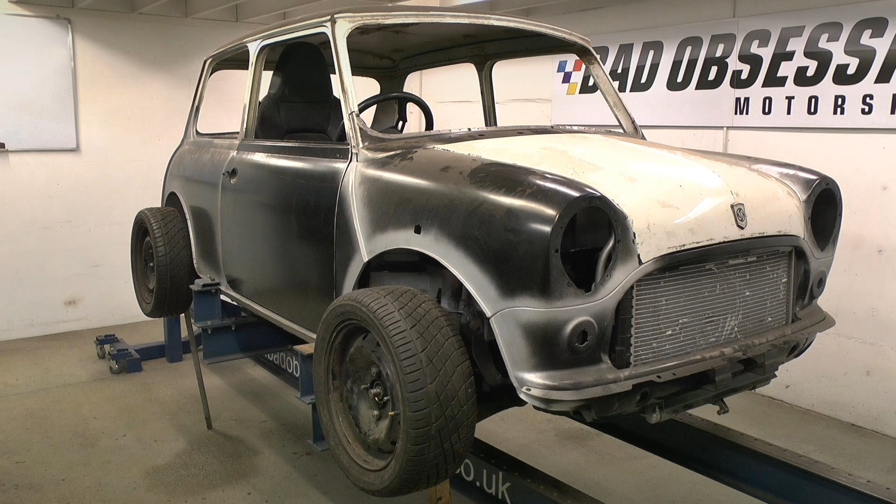Coming up in episode 13, Nick goes completely off script. I mean, it was all bollocks anyway. Look, there's not even anything written on this piece of paper. I'm still wearing a hat. And Ralph takes a nap on the Mini.

At the end of the last episode, Nick said, "You know what? I think we're going to have a look at the fuel tank first." Which confused me somewhat, as we have a perfectly good one here. Yeah, I don't think that's going to work. Some bellends put a strut tower in the way. Ah yes, that was you, wasn't it?

I think it's fair to say we've kicked around just about every option there is when it comes to this fuel tank, and we keep coming back to the same big problem, and that is, well, it's me, again. See, I want to be able to use this car, and that means it needs some range, so ideally I'd like a 50-litre fuel tank, and because it's me, I'd also like to have a little bit of luggage space left over as well, and that's quite a lot to ask of a very small space. Probably worth pointing out at this point as well that none of the options are going to allow us to run with a spare wheel, so that's just something we're going to have to live with.

So, brief history of the tank discussion. Standard Mini fuel tank is right out. It's too small to start with. By the time I've cut enough out of it to get around there, it's way too small. Next option is twin tank. Would be very appropriate, would love it. However, twice the fabrication, twice the plumbing, twice the cost. I also don't think it's a bad idea to keep the fuel tanks away from these two back corners, knowing what mine and Richard's right foot are like.

So we're there on a single big tank. Now we have tried to find a single big tank off the shelf that will do, and there isn't one. So again, we're going to end up making something. And I think it's going to fit on this raised bit of shelf here. So we know it's going to sit there. We know we've got just over 900mm between the inner strut towers, so 900mm on maximum width of tank. We know what the angle is between that bit of flat and the seat back, and we know that we've only got 250mm between this level and the bottom of the fuel filler hole. For everything we don't know, it's over to my colleague.

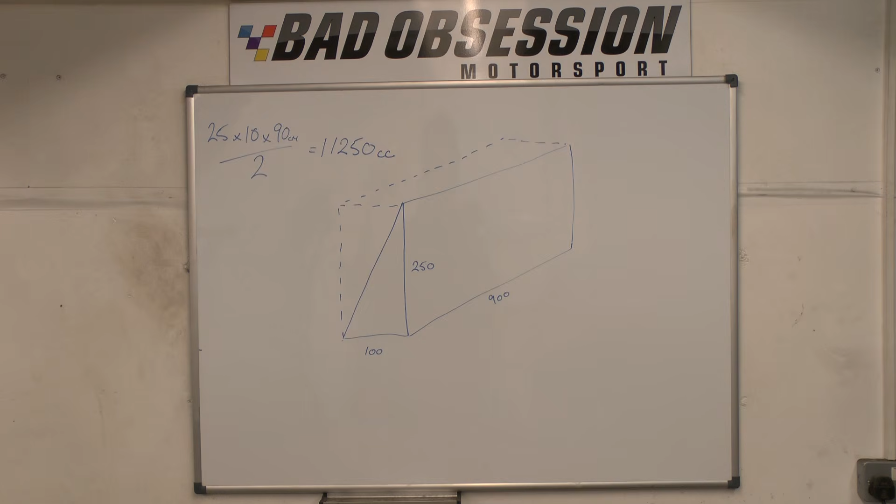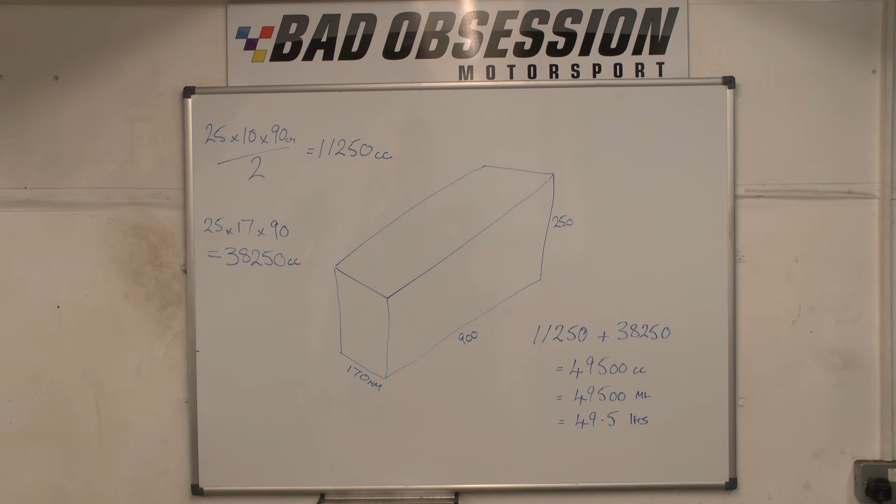This part is trickier. We know the height and the length, but we don't know the depth. To solve this, we need some algebra. So we've got to solve for x. First, simplify to 90 times 25x equals 38750. Alright, keep your hair on. The answer is 17.22 centimetres. But we're going to round it down to 170mm to give us 38250 cc. Add the two parts together and we have a total tank capacity of 49.5 litres. We need 50mm expansion room in the top of the tank, so we've made the height 300mm. So these are the dimensions of the tank we need to make.

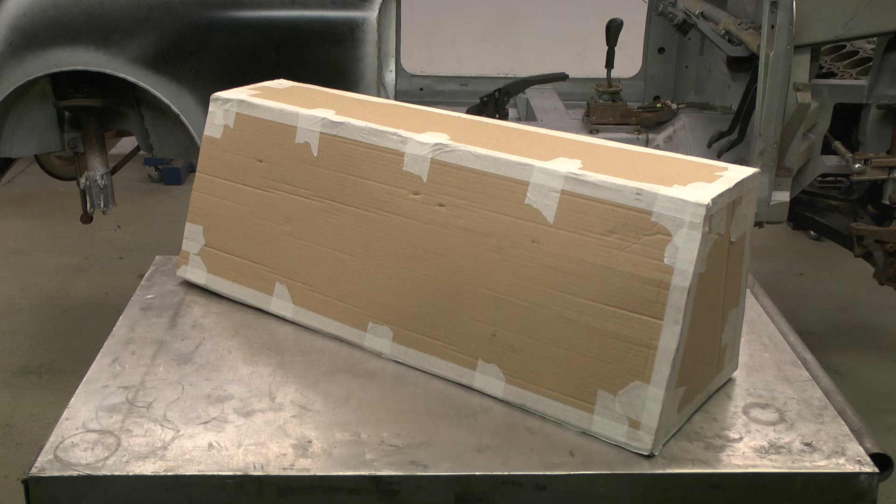So I feel an enormous template coming on. Our normal white card is a bit flimsy for something this size, so we've broken out an old corrugated cardboard box to modify for this purpose. We're still sticking to the trusty old masking tape though, you can't whack it. After all that cutting and taping, you end up with this gargantuan thing. Having said that, we're both suckers for an enormous box. That actually fits really well, but it's a bugger to get in and out.

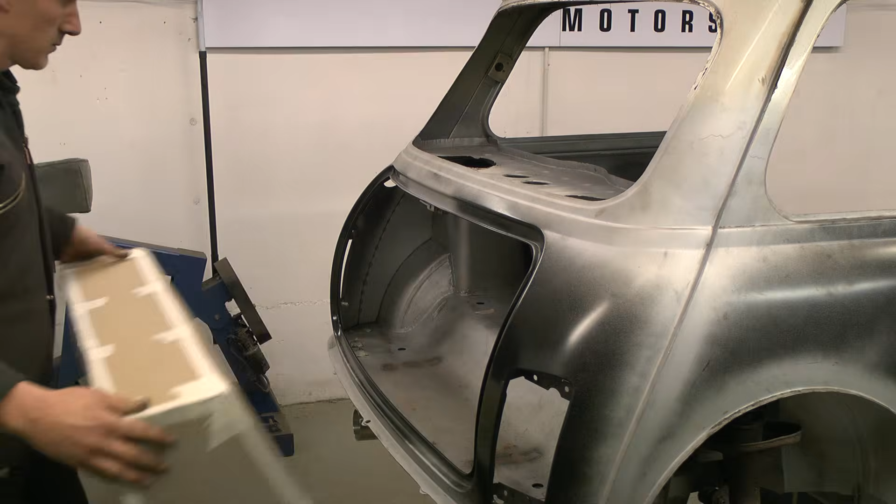And at the moment, it's just a bare box. It doesn't have any of the things a fuel tank needs, like a filler neck or a breather or a pump outlet. So I think the best thing to do is take it out and try again. We're going to lose 25mm off the height and 25mm off the length. Now this will lose us about 1.5 litres of capacity and half of our air gap, but, you know, needs must. So there's your 48 litre capacity. And there's your new receptacle. Should slide in a bit easier now. Lovely.

Well, that goes in a whole lot easier, so I think that's the final dimensions of the tank sorted. But before we get too carried away doing anything else to it, we need to think about a mount to sit it on. The trouble is we can't really make one until we finish the tank. So for now at least, I've got a couple of bits of flat bar that are going to keep everything in the right place until we get there.

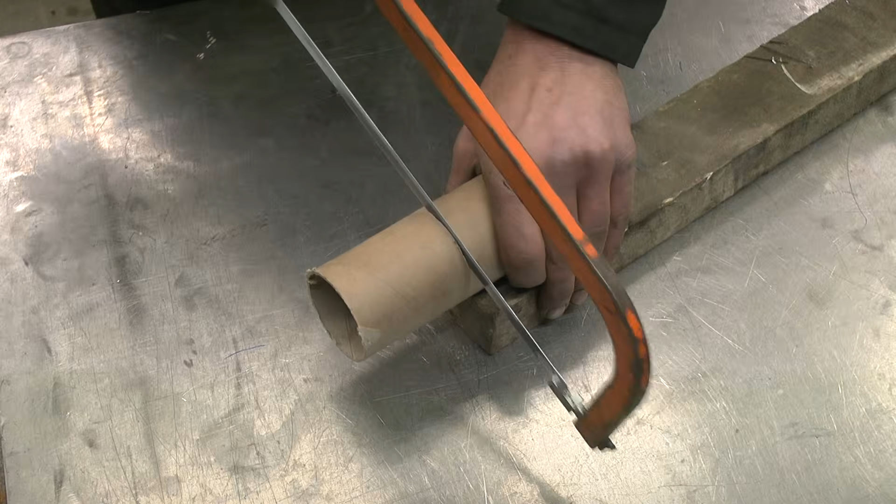Okay, now we can start thinking about all of the other things that the bare fuel tank needs. And I think we'll start with the filler neck. Well, as good a place as any, I guess. A hacksaw, some wood and a cardboard tube will make the dummy filler neck, and with that done, the template is nearly finished. The filler neck was just the beginning. We've also got this lot to consider.

We have got a filler neck breather, so air can escape when you're putting fuel in it and stop clicking the pump out. We've got an in-tank fuel pump, which is the way everyone does it nowadays because it's much simpler and neater. Having said that, the Celica's got a very shallow tank on it, so while we can use the pump on an extension, the return and the fuel sender unit are pretty much useless to us. So, to get around that, we've got a separate sender unit and a separate fuel return.

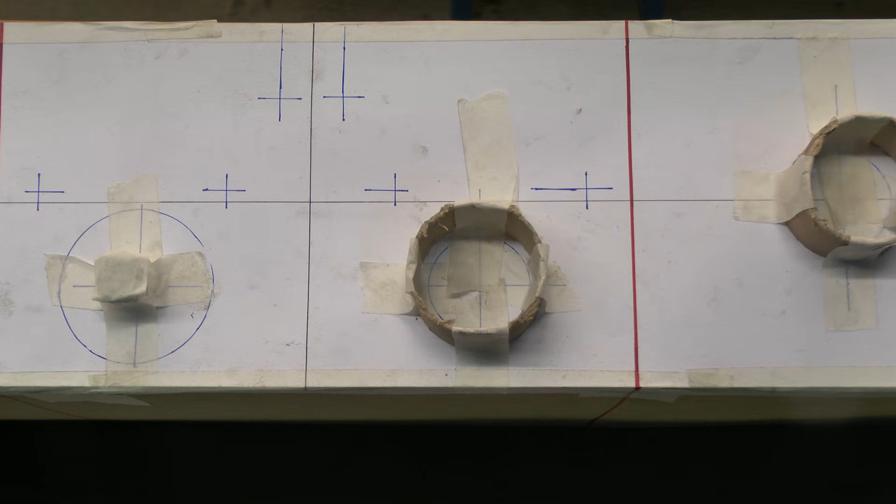This bit here represents a vent and tip over valve, and then these little blue crosses mark the centre lines of some bosses I've got to weld in, so we've got something to cable tie the fuel lines to. And since it's quite a big tank, these red lines here represent some internal baffles we're going to put in to stop the fuel sloshing about quite so much.

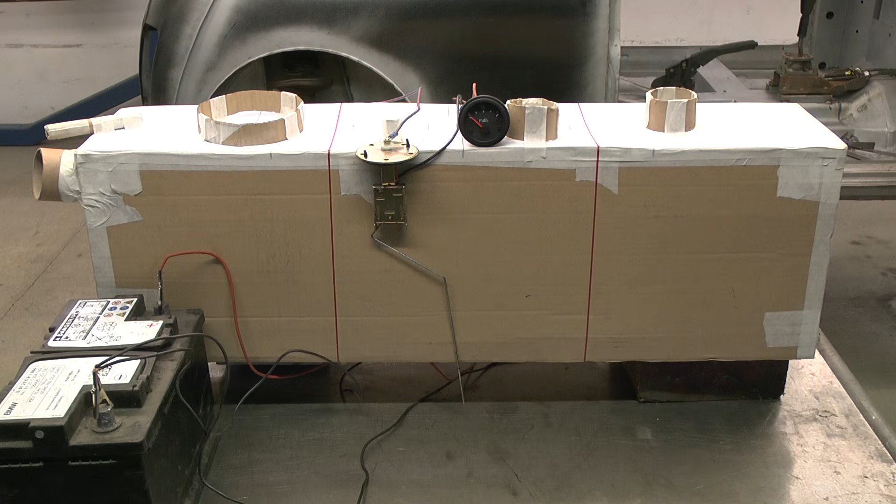I'm pretty sure all this will work fine, but before I commit any further, I need to check that the fuel sender I've got will fit the space available. We've jerry-rigged the sender unit up just to make sure it's somewhere there or thereabouts. And all that looks pretty good from here.

And one last thing is I've added an external sump cum swirl pot that kind of needs to go through the boot floor. Brilliant. Yet another hole in a perfectly good panel just to make things that little bit more complicated than they already are. He just can't help himself, can he? It's an affliction. Still, the box fits pretty nicely and there's plenty of room under the floor.

And while I'm sure that lightweight laminated cardboard fuel tanks are indeed the future, we're not quite there yet. So we need to do that all over again, but with something more substantial. But what to choose? Well, we could go for steel. It's cheap, it's easily available, it's nice to work with, but I'm unsure about its long-term exposure to toluene. Now we could get around that by using stainless steel, but that's heavy and expensive, but it is shiny. So I suppose that brings us to the fairly obvious solution of aluminum. But instead, we're going to use aluminium, because that's what it's called.

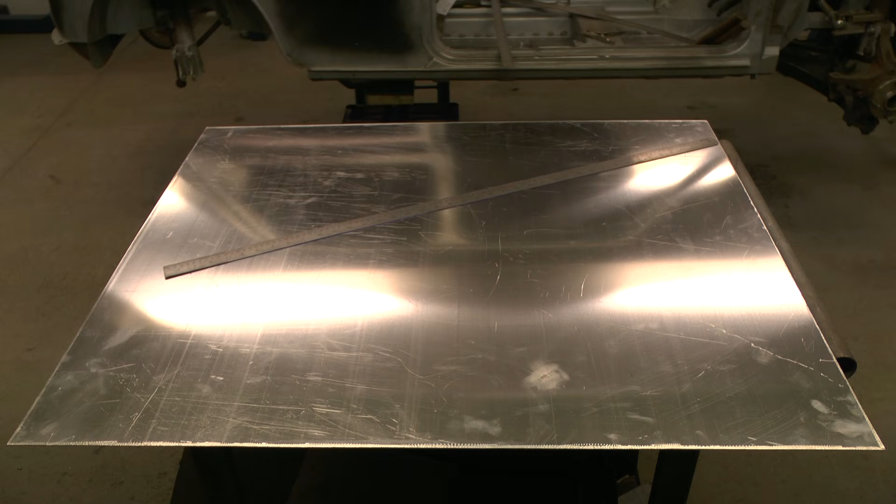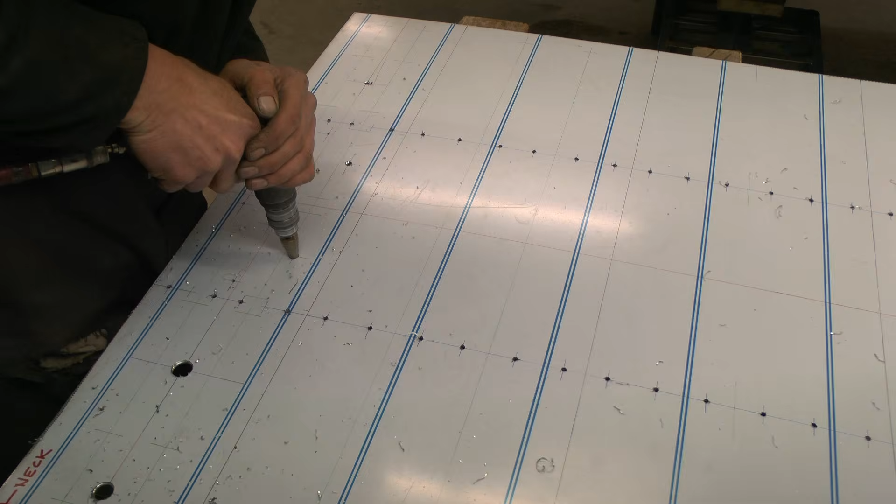Quite. Here's a shiny new piece of aluminium that's been cut to the right length, but it's 25mm longer than we expect to need to allow us a bit of room for error. We're working to this plan for all the measuring and marking out of swage lines, hole centres, boss locations, etc. And the task of transferring it all onto the alloy is laborious, but vital. After all that, we can pilot then drill out to size all the holes needed for the tank's baffles, sender unit, the in-tank pump, return and the breather.

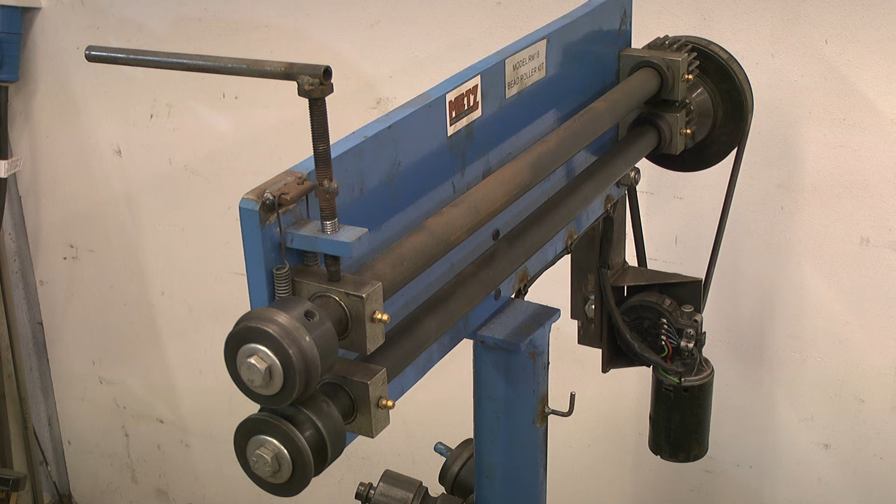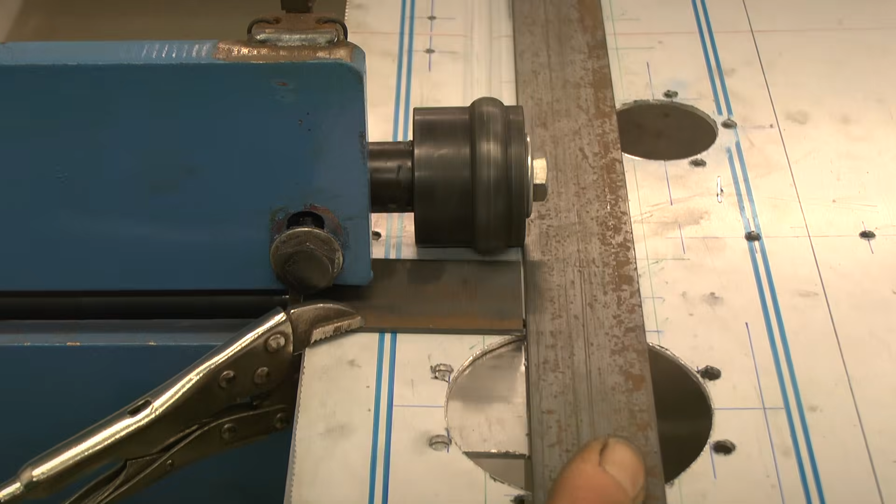I think it's time for the bead roller. The bead roller, like most of our equipment, has been touched by the hand of madness. Another wiper motor and another unnecessary modification. It's not unnecessary, I don't have enough arms. A few bits of flat bar act as a guide and stops, and now it's time to see if his infernal contraption works. Well, that wasn't the complete disaster it might have been.

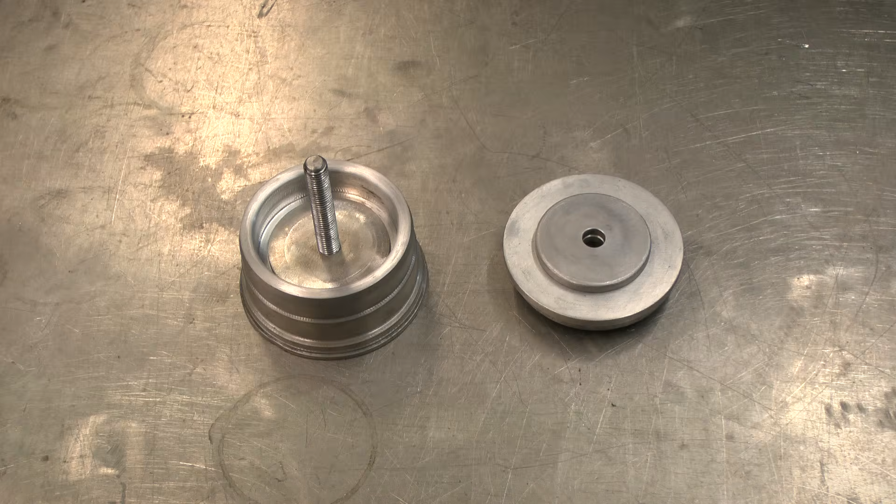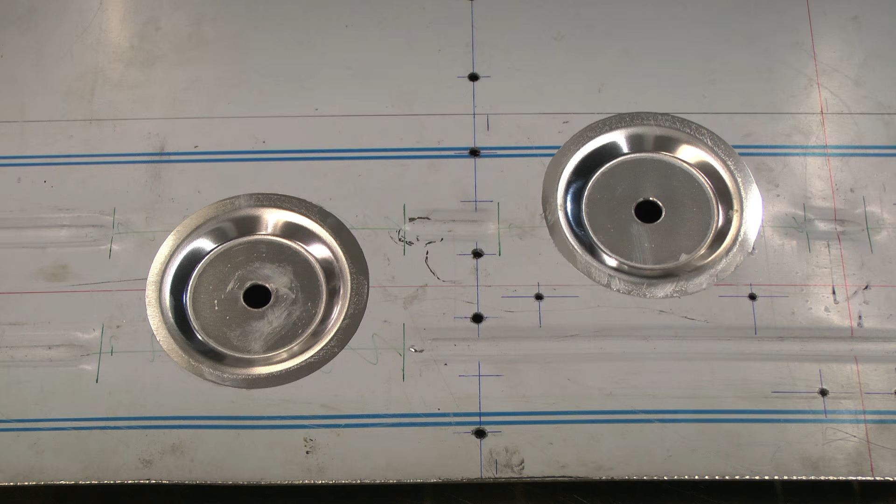With the bead rolling complete, you can see the one destined to be in the bottom of the tank is rolled the opposite way. The next job is to create a large inward swage around the return and the vent holes. We didn't have a dimple die big enough for this job, so we made one. And it works something like this. Now we can drill these out to size for the relevant fittings.

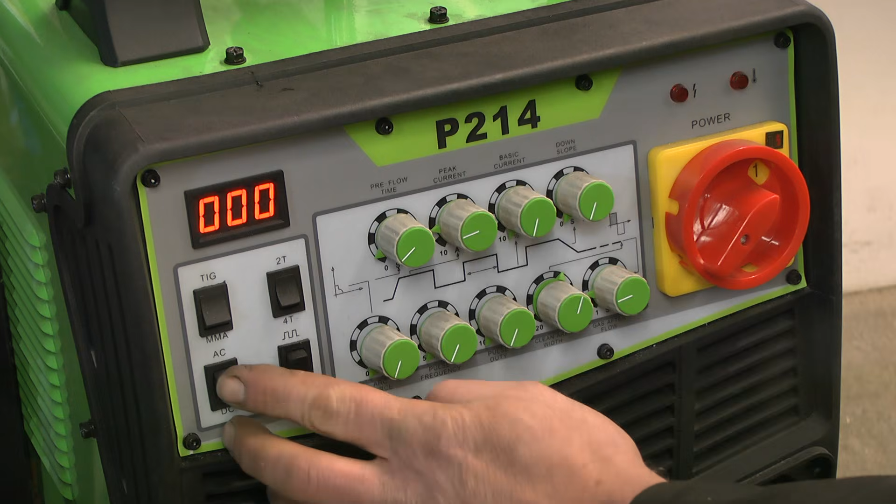And the next job is to whack everything that's got to be fitted in and decide what we can weld from underneath. The captive nut rings for the sender and pump, along with the little alloy bosses for the hose clips, can be TIGged on this side. Time to switch to AC and turn the welder up to 11. Well, at least 5 anyway. That's the first bit of welding on the new tank. And while it's not pretty, it'll do.

Well, that's that bit sorted, but before we go any further, I've got to have a haircut. Excuse me a second.

Whew, that's better. Right, where were we? Oh yeah, I think we're ready to bend this tank up. Time to break out the bender. Or the sheet metal brake if you prefer.

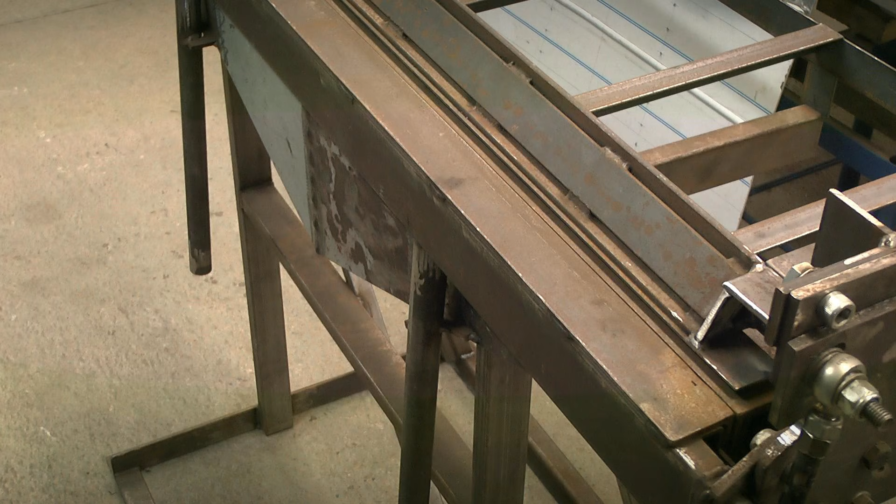You may have noticed we've replaced the big heavy duty bending blade with this much smaller one, and that's for a couple of reasons. The first will become very apparent when we start to bend it up. The second is that this little one's also got a nice radius lip on it, which should give us a bigger bending radius and therefore avoid tearing the alloy. We've already done a couple of test bends so we can get our eye in with where our lines are. So, here we go.

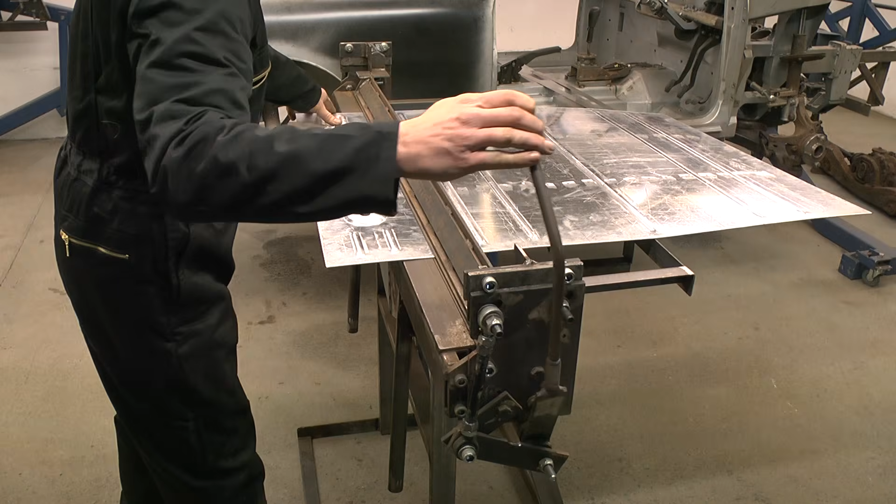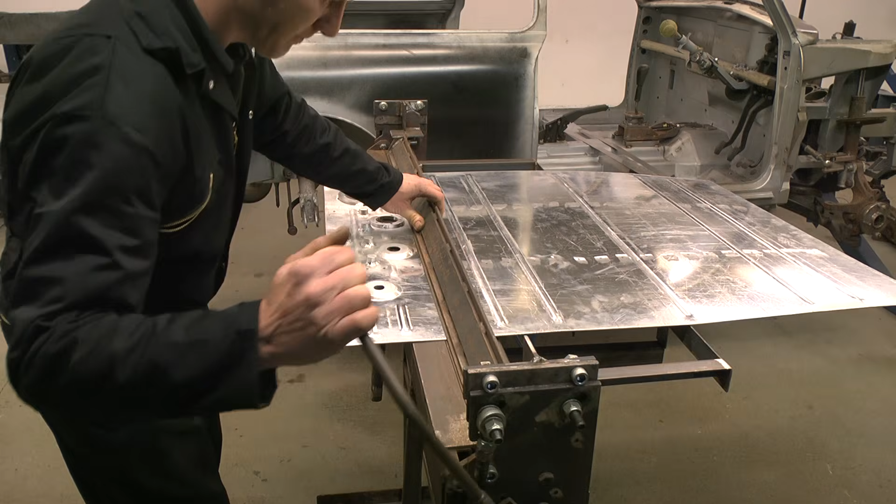Bring the blade down a bit. Line it up exactly where we want it. Clamp it fully. Check it, obvs. And bend it. Probably didn't need that much. Unclamp it, drag it through and do it all over again.

He may sound blasé about it, but one false move and hours of work go in the bin. You only get one shot at bending alloy like this. And then the same again for the final time, only this time over 90 degrees, and we should end up with something that looks like it might become a fuel tank. So.

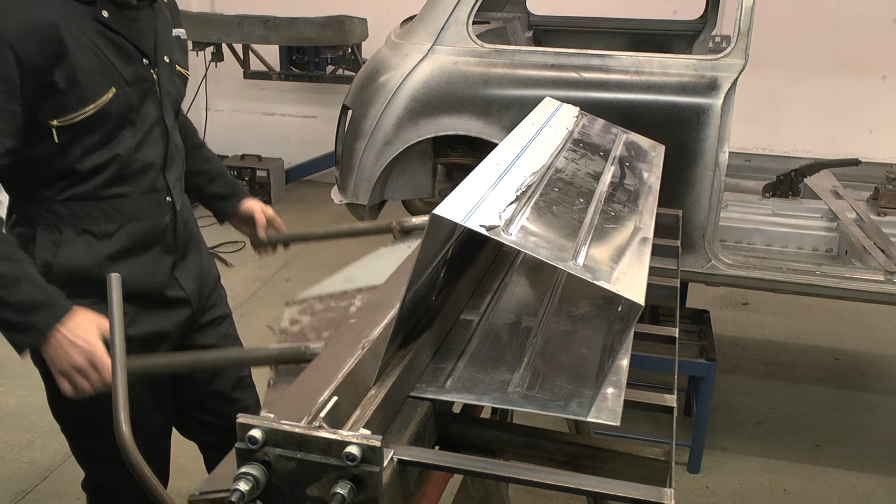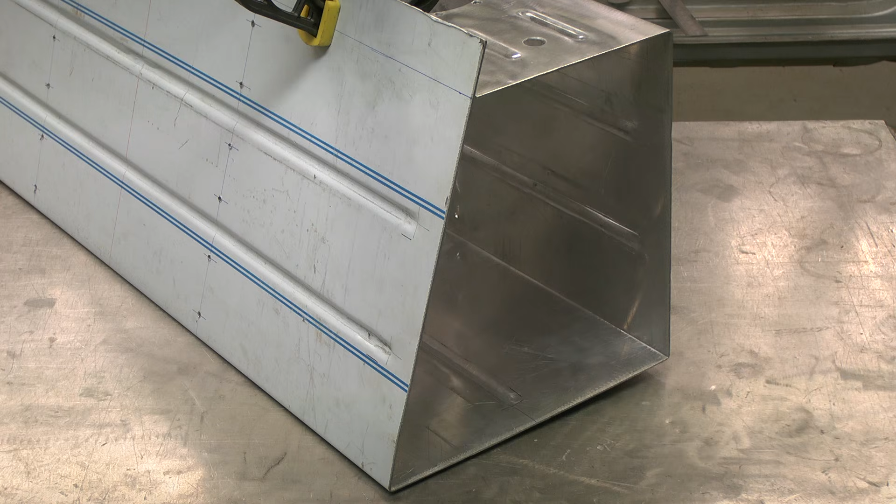Thankfully, nothing went spectacularly wrong. So what we've ended up with is this, the makings of a fuel tank. We can just trim that overlap off exactly at the line. You can now see that the only convex bead at the bottom acts kind of like a sump channel. So now all we have to do is weld up this seam and add a couple of ends on. Simples. I'm afraid it's just not that simple.

There's loads that needs to happen before we get to that stage. I find it odd that everything in voiceover land seems to be so easy. Do you know what I find most baffling? It's these, and they need to go in next.

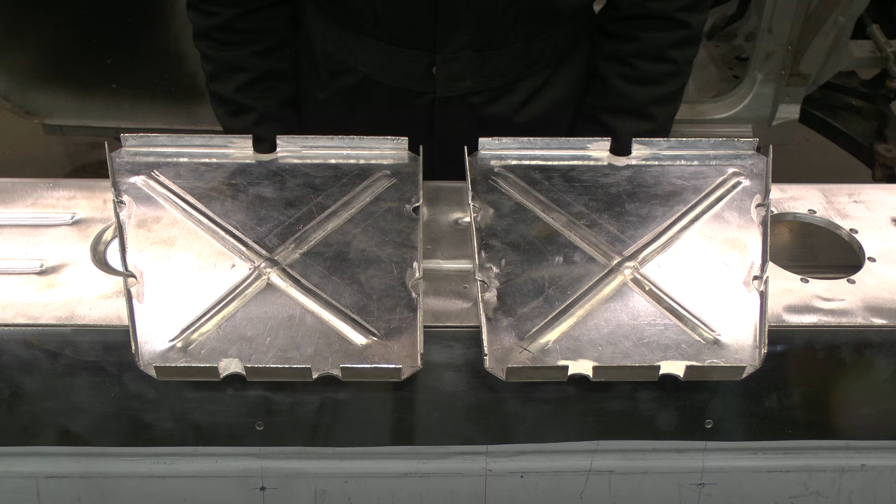God, really? Don't groan. I'm doing the best I can with what I've got. I tell you, voiceover land isn't exactly a bed of roses either. It's all I can do to make you look competent.

Anyway, on to the obligatory plug welds for the baffles. There's dozens of these and they're boring, so we'll move swiftly on to the linishing and the minor adjustment. We'll worry about getting rid of those linish marks when the thing's finished. Right now what we need to worry about is getting this swirl pot stroke sump thing attached in the right place. So we've made that hole in the boot floor a bit bigger for some clearance and spent way too much time trying to measure and mark this out correctly.

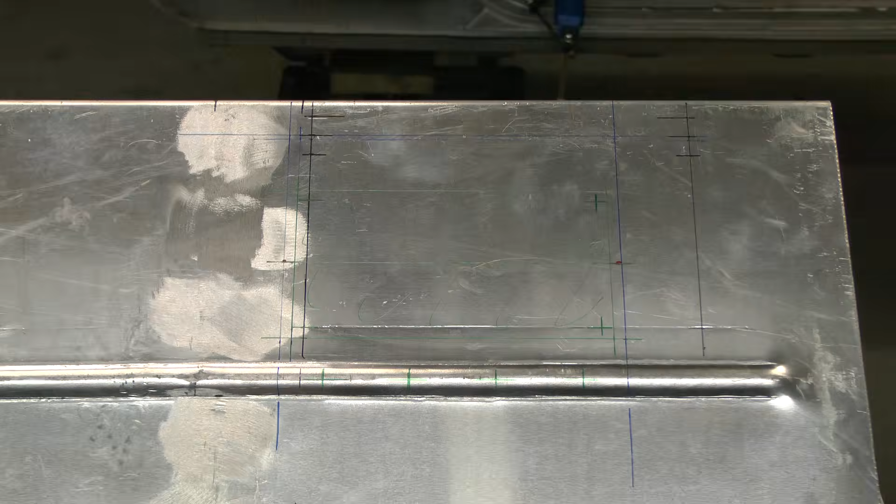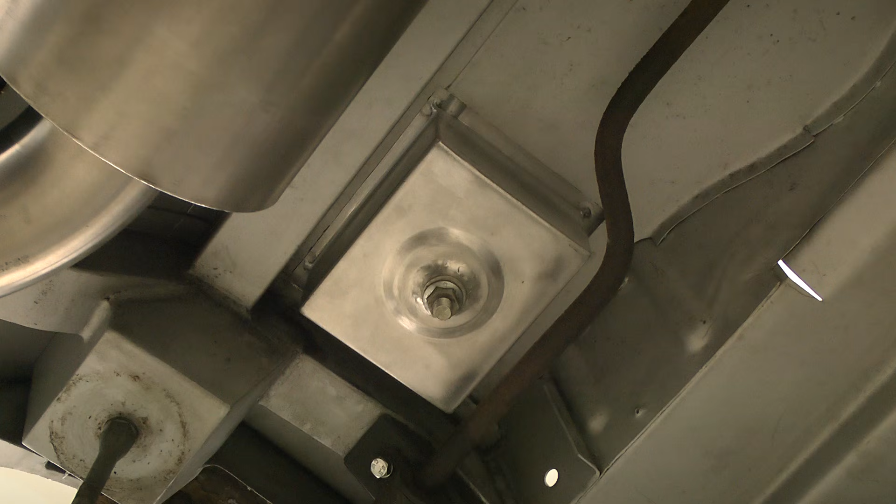But now it's done, a few holes and a grinder later, and the hole is cut out. The hole is smaller than the sump as it only needs to be big enough to pass through the filter sock on the fuel pump pickup. With the sump, swirl pot, fuel collector made, it just gets tacked on for now to make sure we can actually get the tank in the car. And yes, this shot took more than one take after twatting the bloody thing on the boot lid surround multiple times. We've added a drain plug, just in case we decide to drain all the fuel out for some reason.

With the fit confirmed, the sump is then welded on fully. The next task is to weld in this -6 fitting for the fuel return line. Trouble is, I don't want the fuel returning to the top of the tank, I want it returning to the bottom of the tank. So we're going to have to modify this first with this bit of pipe.

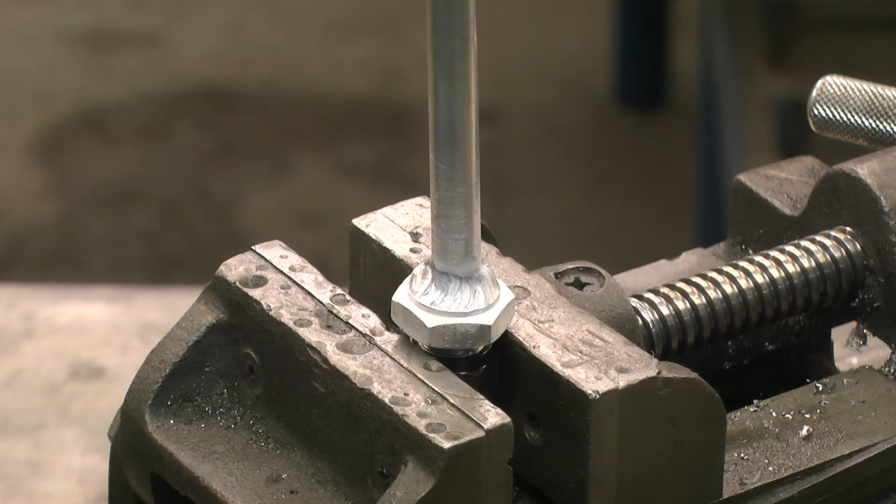To make this drop tube, we take it out to 10mm after carefully setting it up on the drill, as that's the OD of the ally tube. Squaring the whole end up with the end mill allows us to go the full 6mm depth that we've got. After cutting the tube to length, it can get tigged onto the fitting, and then the fitting can be welded onto the tank. The end of the tube is also strapped to the bottom of the tank to prevent any waggling about.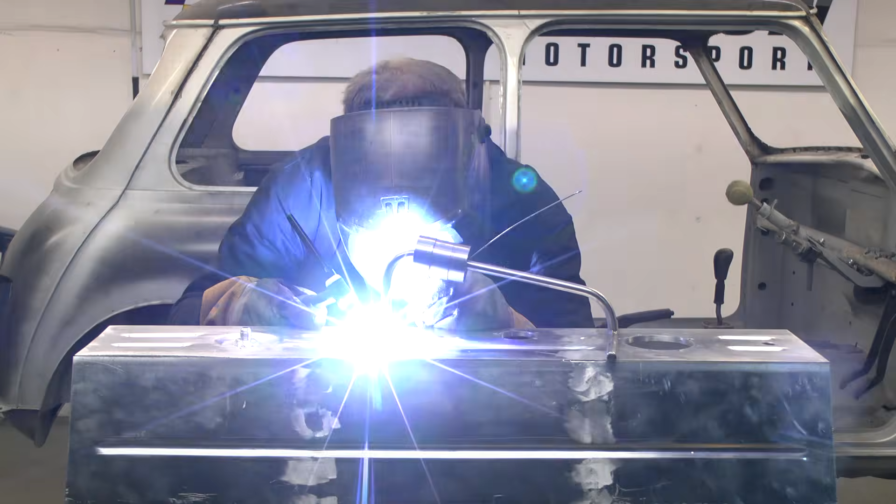While that drop tube will certainly stop all the aeration in the fuel on the return line, it's actually more about stopping it sounding like someone's constantly having a waz in the fuel tank. That does get annoying. Anyway, now that's done, we've got a boss to weld in for the vent, and we need to take a look at the breather. And then we can think about some ends, and we might actually get this tank finished. After welding in the boss for the vent, and Nick's finally getting his head round ally welding with this new setup, it's time to move on to the breather.

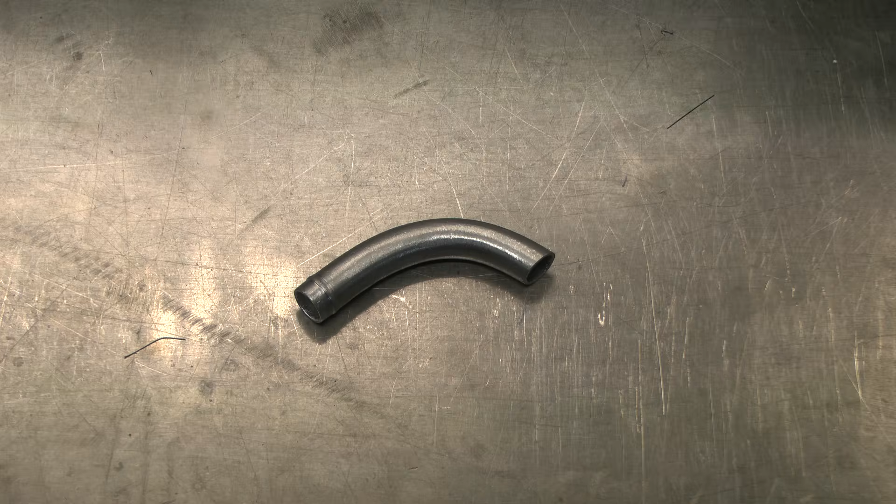And a brand new contraption built specifically for the job of creating a barb on the end of the tube. It's obviously a bit too high here, so we've got to open out the hole of it so we can drop it down and then keep it in the correct orientation. Before welding it in, it's lined up with the red marks, as that's the line that the filler neck is taking that mates up with the original hole in the rear quarter panel.

And this is Nick proving that the pro welders you see on YouTube are actually very good indeed, and that we both need a shed load more practice.

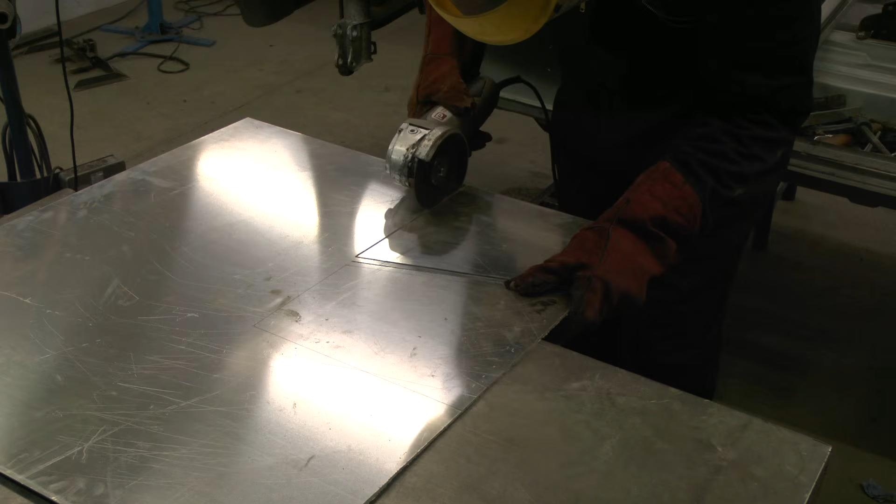So all this thing needs now to become a fuel tank is some ends, so after cutting out, a swift visit to the bead roller, and some more TIG practice, we've got one of them on. This end piece of the tank is an exact mirror image of this end. Almost literally, in fact. But as it stands, we've got no way of getting fuel into the tank, so we need a filler neck. And that means another blooming hole. Last one, I promise. This tank has more holes in it than a slice of Emmental.

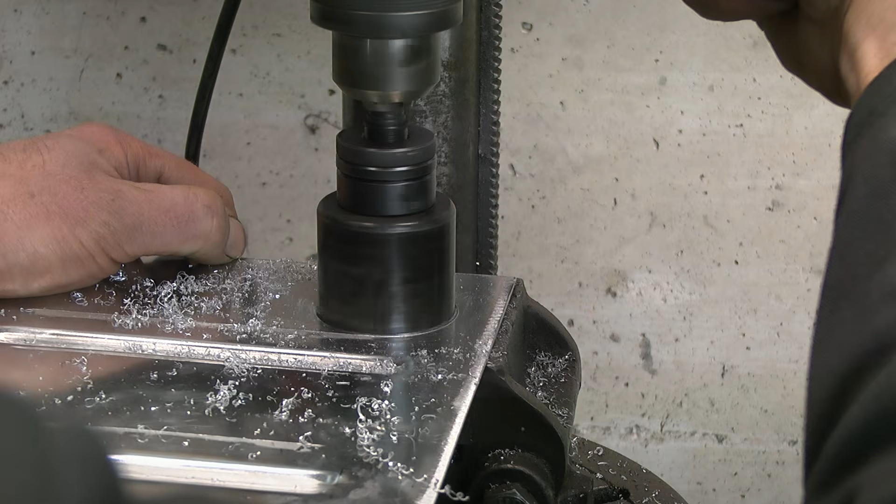You know what goes well with cheese? A nice glass of plonk.

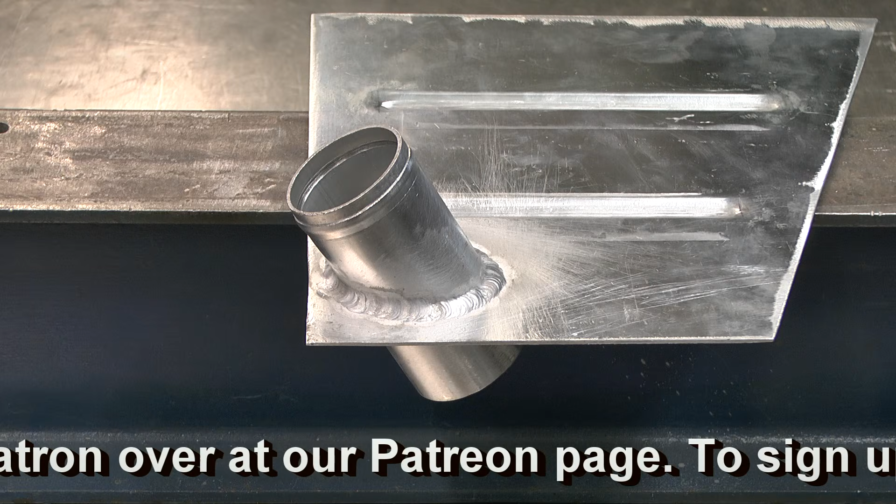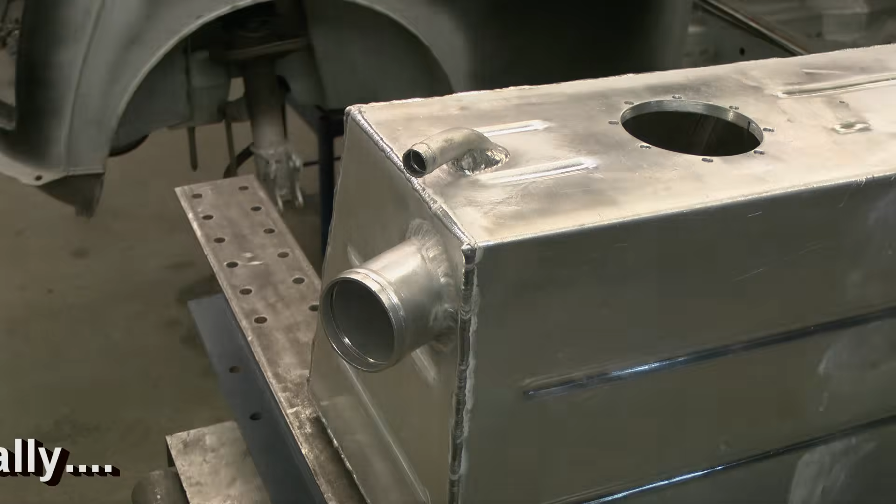So there we have it, all done. We've got the fuel pump module and the level sender, we've got the vent tip over valve and the fuel return, and we've also got the fuel collector in the bottom. So that's the fuel tank finished. Excellent. Well, it certainly looks like a fuel tank, I'll give you that, albeit one with some slightly uneven welding in places. But no, at the moment, this is what I would describe as a Schrodinger's tank.

Oh no, you've welded a cat in there. No, I haven't. Let me explain. As it sits here, this aluminium box may or may not hold fuel. If it holds fuel, great, it's a fuel tank. If it leaks, it's a very large, very difficult to use colander. As it sits here at the moment, it's unproven as either, and therefore it must exist as both. You see?

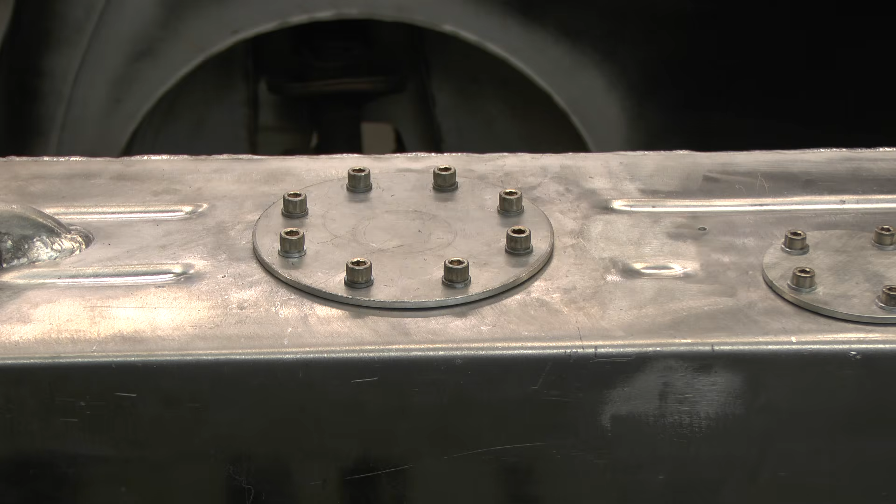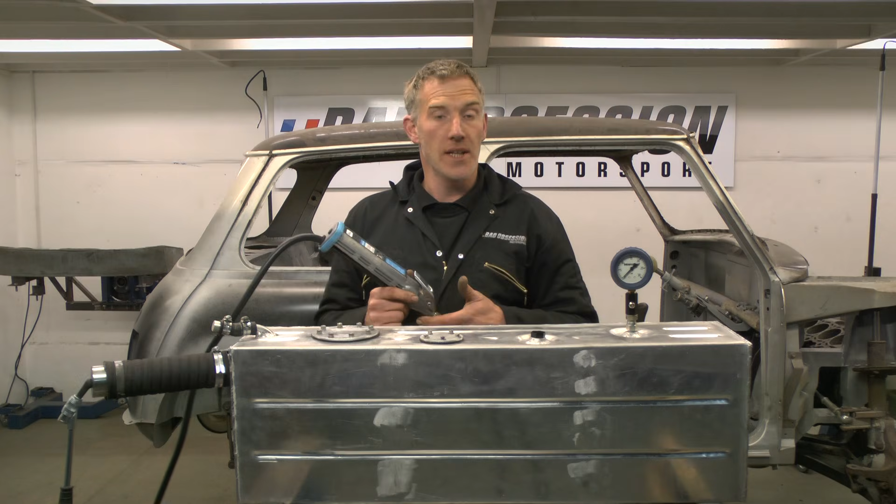Great, so to prove whether we've got a fuel tank or a large sieve, we're going to need to blow it up. No, with air, not C4. And to inflate the box, we've got to seal all the known orifices. Judicious use of sealing plates, cap heads, elastic bands, jubilee clips, custom-made bungs, and the addition of an adapted tyre pressure gauge will verify whether the cat is alive or dead. We're not trying to inflate the fuel tank here, we just need it to hold a few PSI for a little while so we know it won't leak fuel.

Looks like it's time for a brew. That's a relief, because I can't tell you how many hours are in this. It's not the prettiest, but it'll do the job, so I need to get on with mounting it. Which I guess actually makes it a 3-pint tank.

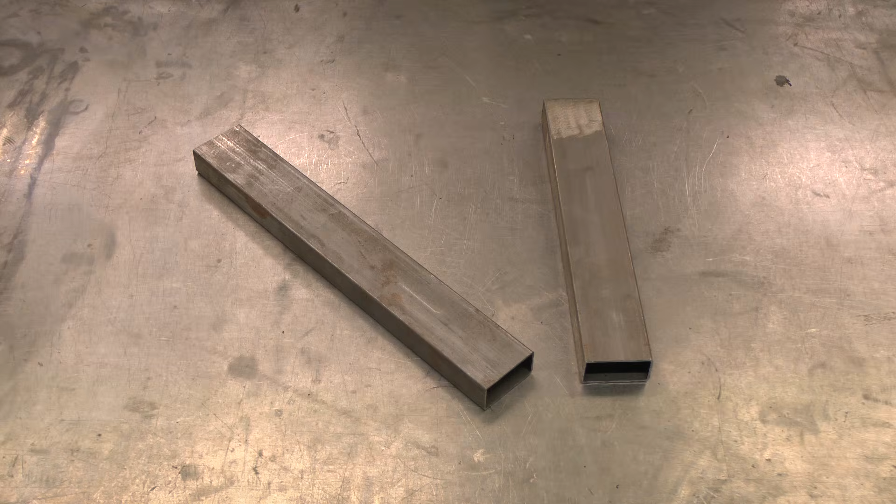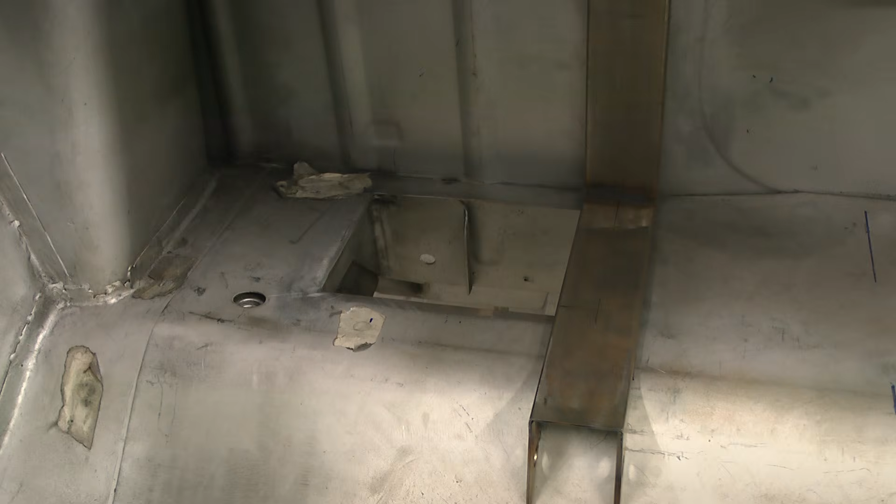We start with some 25 by 50 box and then split it down the middle. Then clamp them to the tank and weld the join up. You'll see what all these little plates are for in a bit. They're going to get welded in something like here, but before we can do that, we need to sort out this big hole in the boot floor. Yes we do. First up is the CAD template, obviously. And after cutting it out on the 1mm sheet, yet another bloody hole is cut in it so we can access the drain plug. This captive ring will locate the removable access plate for the drain plug.

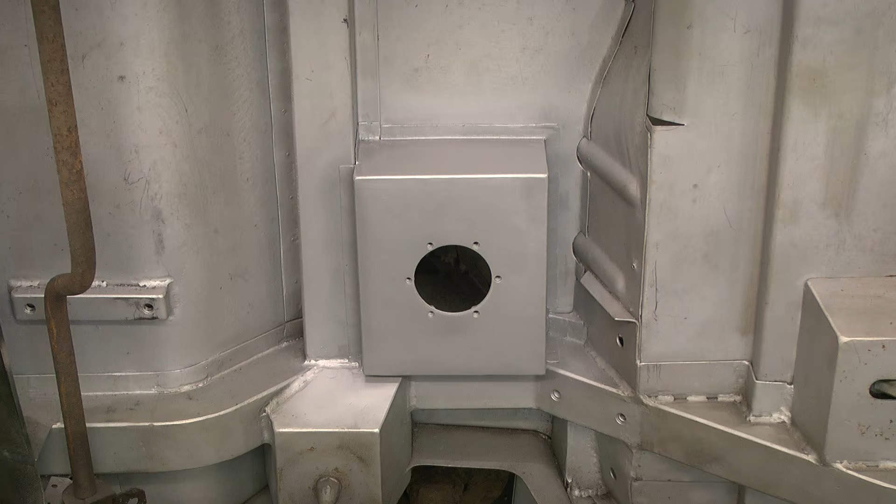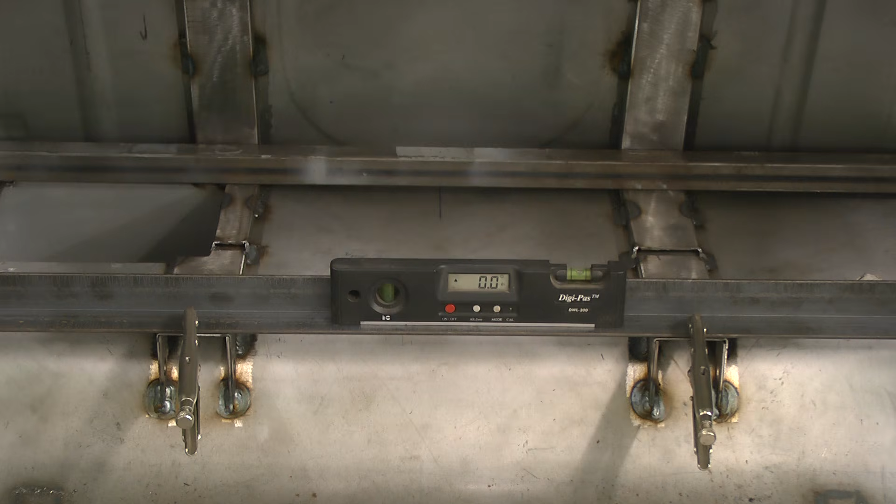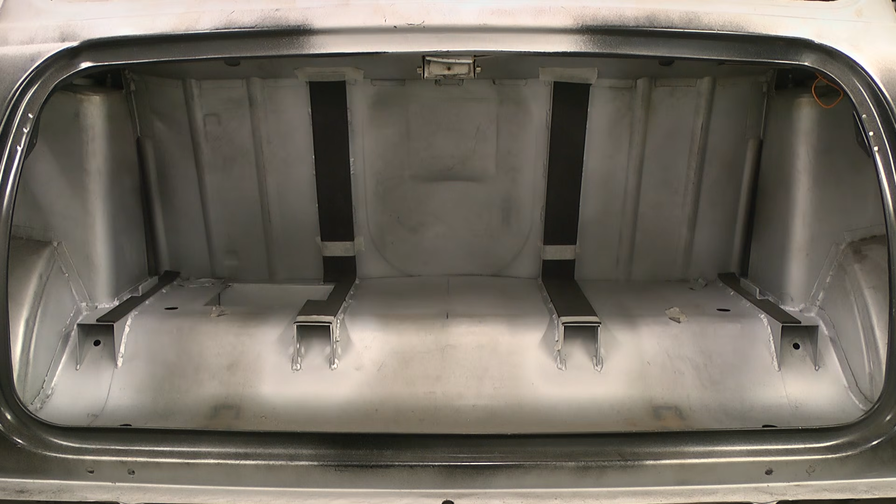Now the box is welded in, linished back and primed, it's time to move on to permanently fixing the fuel tank mounts. Moving swiftly on from what's effectively just a shot of Nick's arse, these fellas are for the ends of the tank to sit on, and they fit in here like this. Before it's welded in though, we have to make sure it's totally level. Make the noise! So there's the tank mounts completed. We've added these two little angles to stop any sideways movement in high G-force situations, and the mounts have been finished and primed and covered in high density foam rubber for vibration resistance.

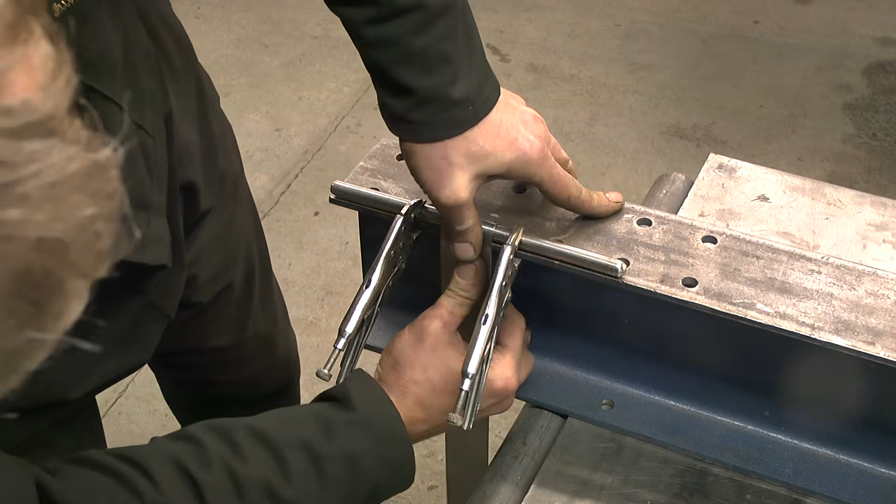I'm guessing you're way ahead of us on how this is all supposed to work, so it should come as no surprise that next we need to make some straps. Now we could have made this quick and easy by using a couple of ratchet straps, but oh no, that's just not complicated and challenging enough. So what we're going to do is drill and weld and bend and form and grind a couple of strips of steel to make a pair of the most elaborate straps this side of Kanye West's watch collection. We debated the method of tank attachment for a very long time over many cups of tea, and while this isn't the simplest way of achieving it, it's elegant and effective, if time consuming and complicated.

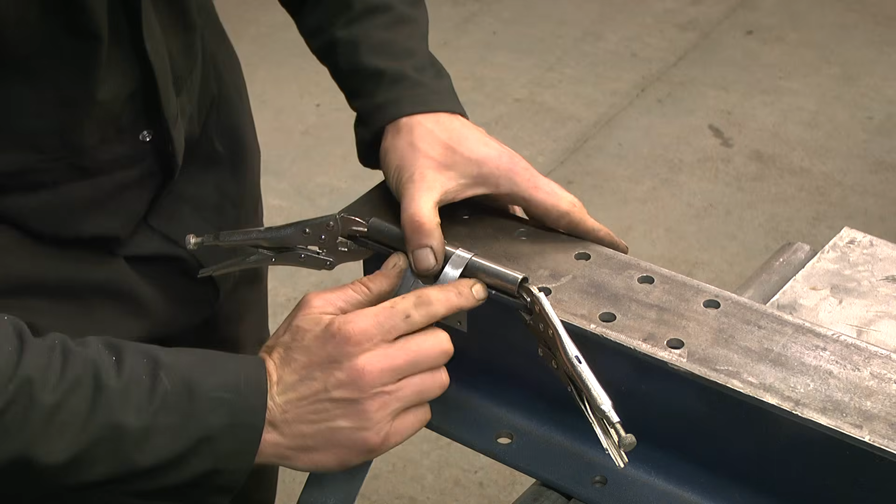But what I really want to know is, where's the black paint come from? What we need next is a tidy looking way of attaching these to the car. If you're easily startled, I'd look away now.

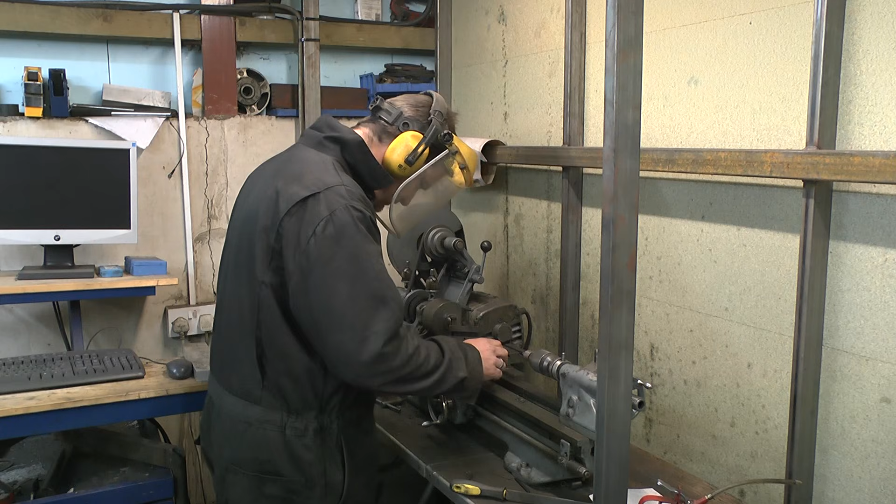Cheeky git. Contrary to popular belief, I do actually do loads of stuff in the workshop, you know, like sweep up, make tea, tidy up, film, direct, edit, argue and produce these delightful little bits to bolt the straps up. They work in conjunction with these two captive nut plates which slot into these pockets in the seat back, something like this.

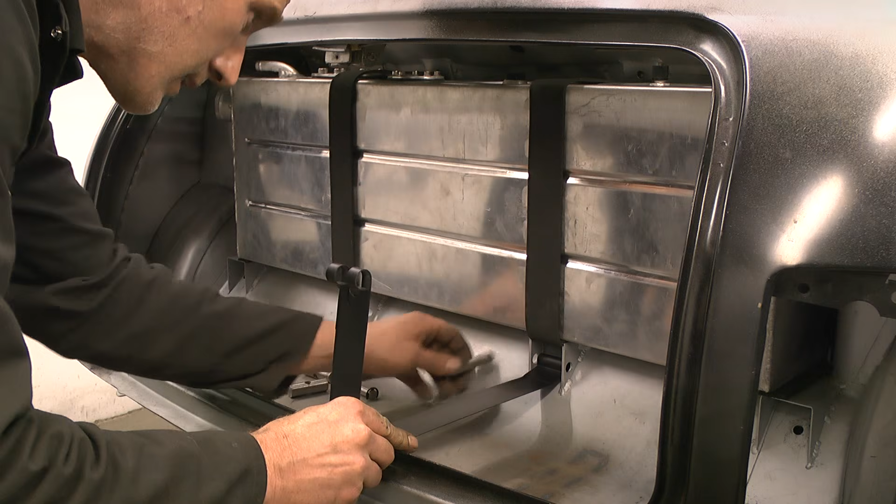After adding some more foam rubber to the fuel tank, the whole thing can now get assembled. An 8mm bolt with a nylock would have done at the bottom fixing, but the circlip grooved pin is a neater solution. The top fixing pulls the whole assembly tight against the mounts and squeezes the foam rubber to avoid vibration. Voila! The tank is in!

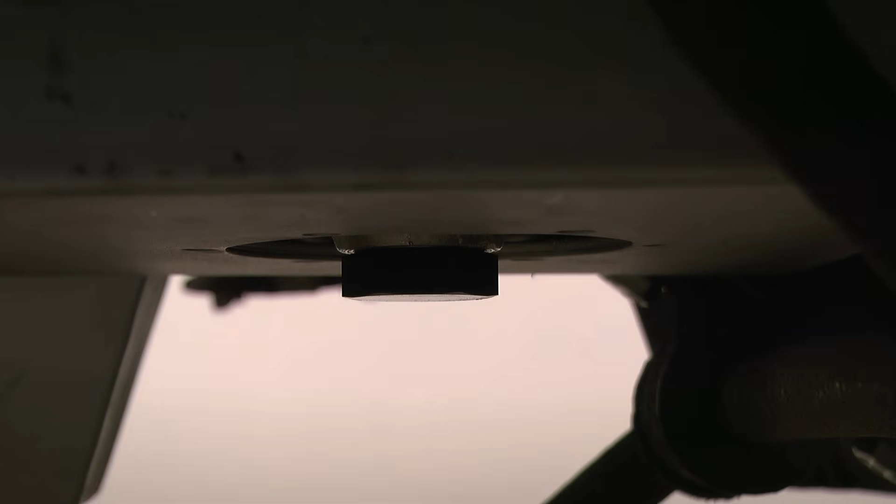If I've got my measurements correct, underneath here should be a hole in the boot floor, and sticking through it should just be the bung of the fuel tank drain. Now that's not a good idea, so we better build something to protect it. Thankfully his measurements were correct, and there's the sump plug. To cover it, we just have to join these three bits together with the welder. There. That looks really good.

Time to bolt this baby up and... Hold the phone! He's painted this piece black too! He must have had a job lot fall off the back of a lorry or something.

Still, it's very pretty. We've got one last job to do before we can call this install done, and that's to sort the filler neck. Now I want to keep an OEM appearance on the outside, so the easiest place to start is with an OEM neck.

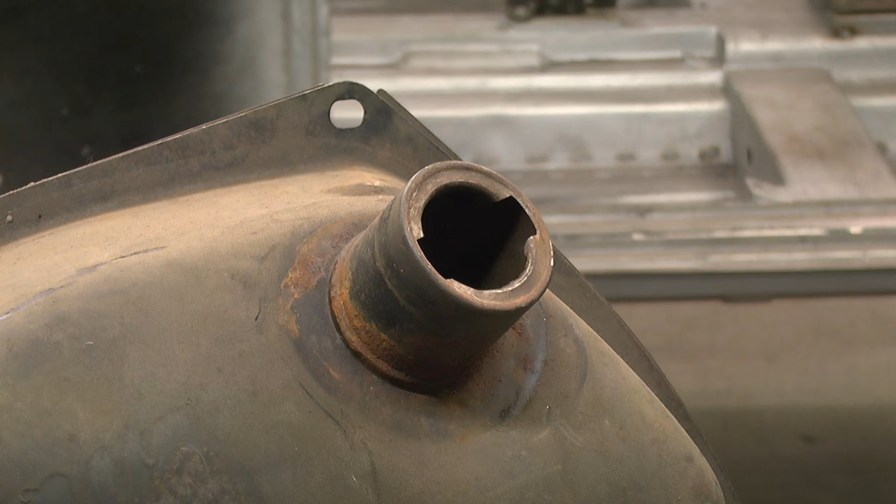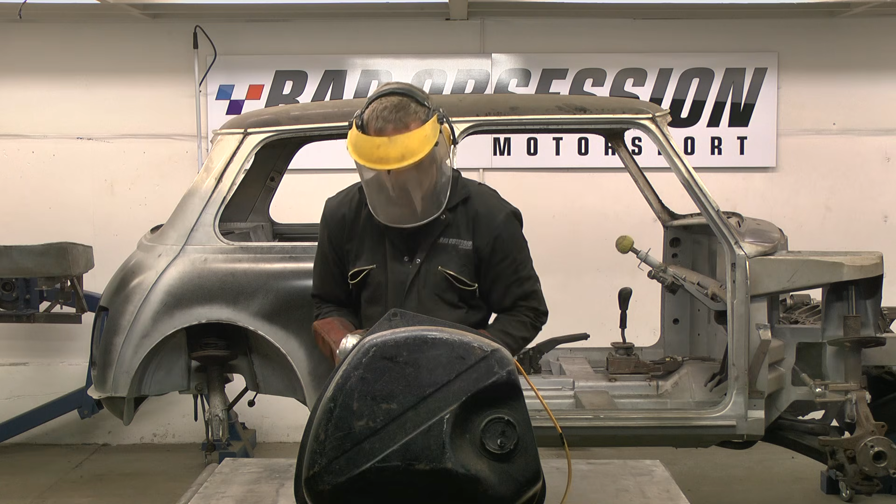Still bloody full of fuel. We'll have that after for the... Stop right there! Moving on, this is the only bit we need off the old tank, and the plan is to remove it very carefully and very safely. Joking. No, even we wouldn't do something that stupid.

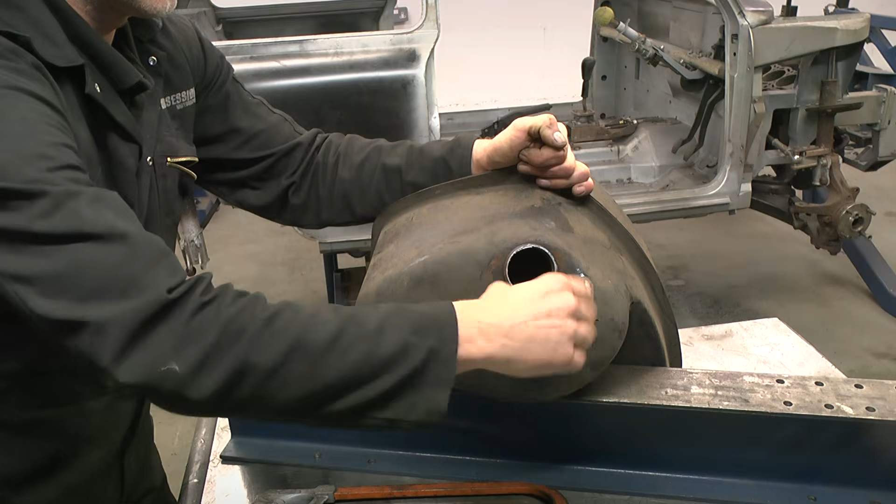After a little cleanup, it fits nicely over the swelled end of this 2-inch exhaust tube. Now shortened, and the other end bead rolled. And now with the breather tube attached, and finally the support bracket welded on. That fits to this little bracket on the strut tower. There, sorted. That's it then.

Done! So why bother going to all the effort of strapping this tank in instead of just welding some alloy tabs to it and bolting it to the floor? Well, I'll tell you. This particular tank, with the pump and the sender and a couple of bits on it, is 10 kilos. Add to that the 50 litres of fuel it'll carry, another 38 kilos, that's 48 kilos. 105, 106 pounds if you're trying to work it out in America. And that is getting close to the weight of the gearbox in this car.

Add to that the fact it's all sloshing around, and you can see how very quickly any aluminium tabs welded to the thin aluminium tank will stress fracture and crack. Bad news. So, very small tanks, welded tabs are fine. Anything bigger, spreading the load with straps is where it's at.

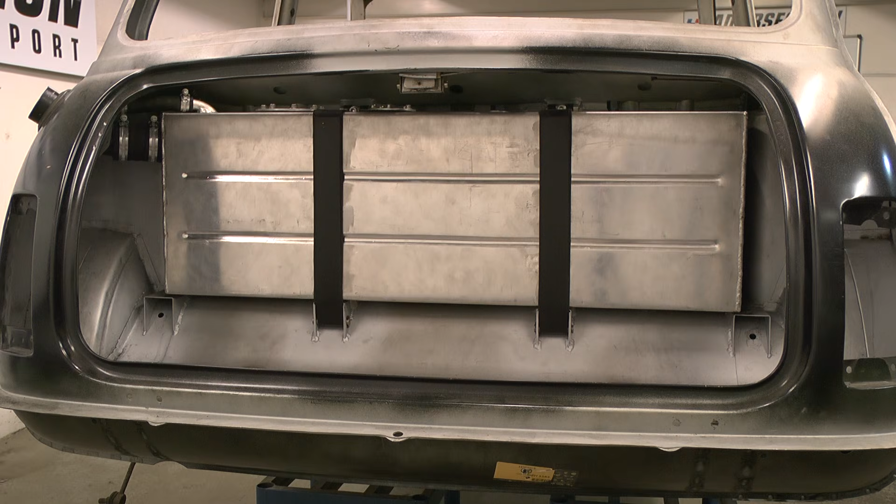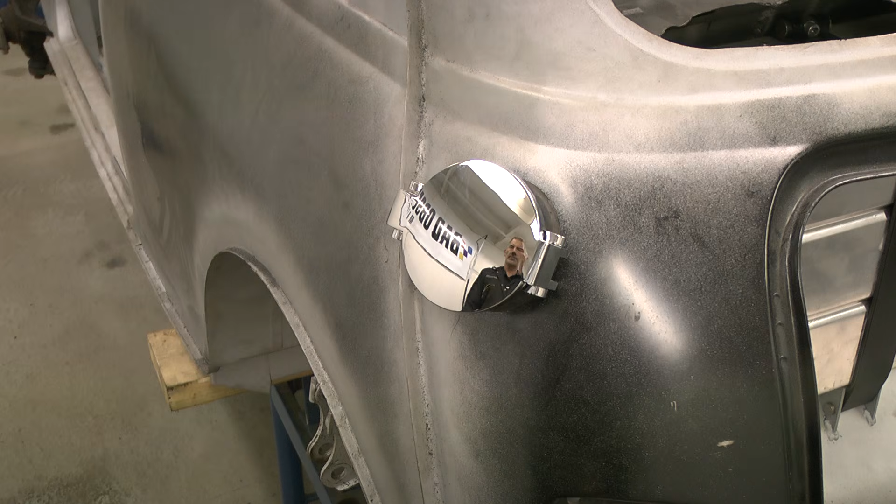Right, one last small job to do, and we can call this tank done. Ah yeah, of course, the filler cap. A brand new OEM cap will do the trick nicely. That's not a brand new OEM filler cap, is it, Nick? Yeah, I know it's not the stock look I was talking about, but I was on eBay and it was so shiny I had to have it.

Anyway, it's all got to come out now because it's time to have a look at this parcel shelf. About bloody time too. Let's get cracking. I suppose we should probably start with the speaker holes, keep him happy. Now, the plan was to create a metal pocket in there and try and drop the speaker down inside it. Now, due to the fuel tank, the amount we can do that is negligible and therefore it's not worth bothering with. So now I think we'll just keep it simple, plate over the whole lot, no one's going to see it anyway, and then we'll worry about the speakers when we get to that stage.

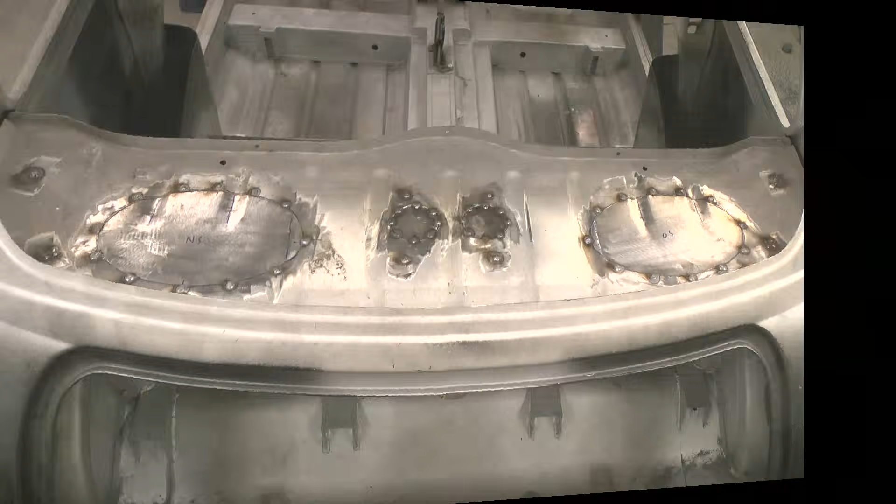Even though no one's going to see it, we're still taking the time to trim and tidy these awful excuses for speaker holes before using a 2-dimensional CAD template to make the closing plates. Now that the speaker holes are filled in, the 2 small holes in the centre of the parcel shelf shall get the same treatment. Well, that takes care of the holes in the parcel shelf, but to have a proper firewall, we need to do something about this.

Ironically, to fit these plates to seal the firewall, we've got to drill more holes in the parcel shelf. There. That will do. When it's seam sealed, painted, sound deadened and carpeted, no one will ever know what a state it was.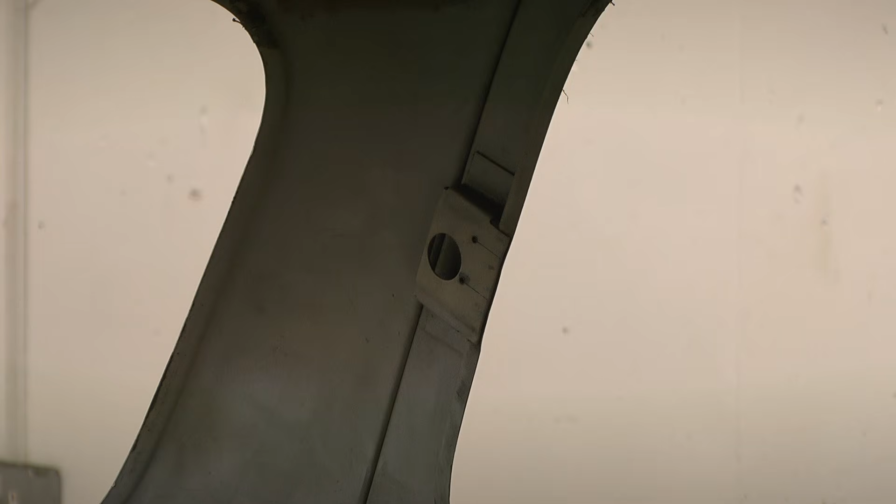Whilst we're working at the back here, I rescued these C-post stiffeners out of a slightly later car that had been totaled. I don't think we really need them, but we've got them, and a bit of extra stiffness never hurt anyone. Before these stiffeners go in, the window latch bracket has to go, so the grinder is deployed once again.

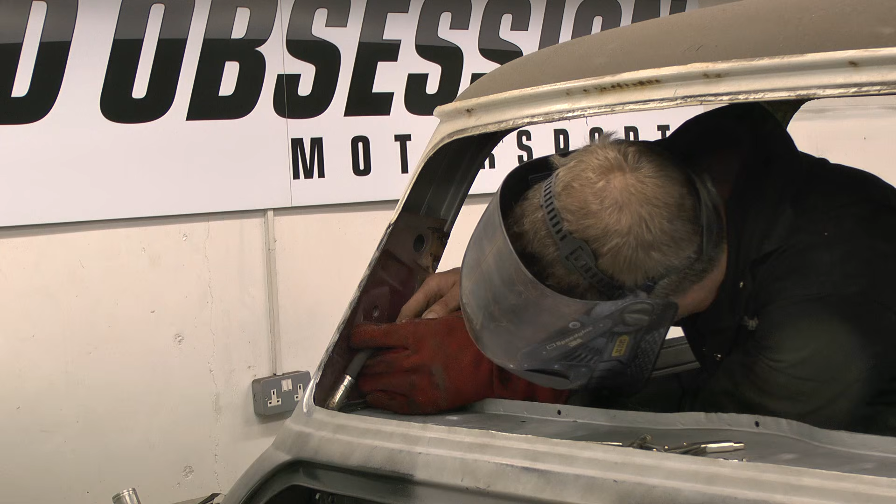There wasn't much prep needed for the stiffeners, as Nick had already drilled out the spot welds when removing them from the crashed Mini. So with those in, it's a little stiffer up the rear end. One more thing, reinforcing the seatbelt anchors. There, that's sorted and a lot stronger than the original mounts.

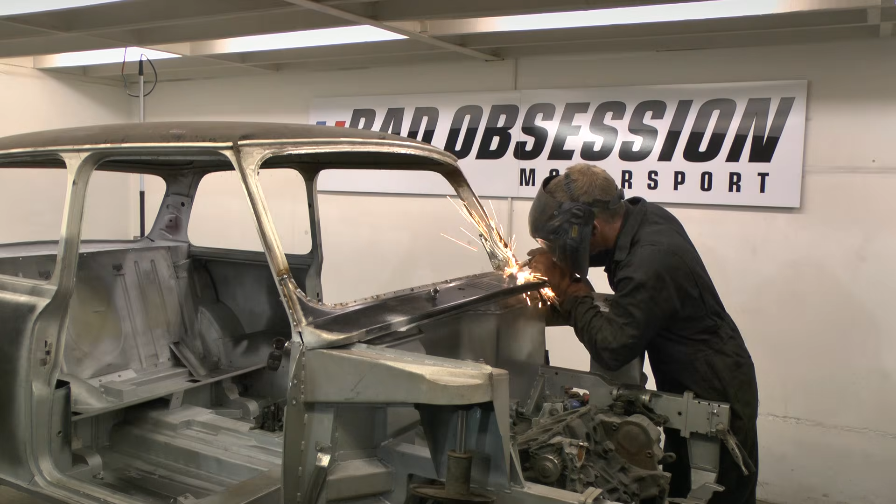I think that's all the major structural chassis work underneath done now, so perhaps we should go back up top and revisit the scuttle panel. The scuttle panel. This was left pending making sure the new bulkhead missed the wiper wheel boxes, because we didn't have a complete set to try. Well, now we do. And yes, they do fit. Just. Now it's just a case of plug welding it on for good. Then a careful linish back and boom! The scuttle panel is finished.

I suppose we better just check the flip front fits nicely. Yeah, that's not bad at all. Excellent. I think sorting that scuttle panel marks the point where all of the major chassis work is done, barring any alterations we might need to do later on. It also marks the point where I run out of things to do that isn't sorting the wheel and wheel arch situation out. So I suppose we better have a look at that next.

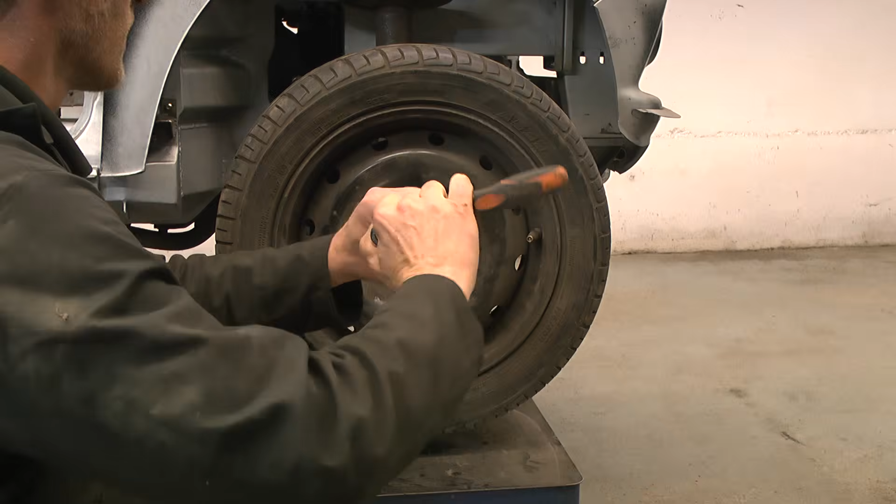Right, so let's bolt all the wheels back on and drop it down onto our show stands. This marks the first time the Mini has actually sat on her wheels for more than 3 years. A lot of people seem to think that these tyres stick out way too far and are going to be a bit of a problem. Whereas anyone watching who knows Minis is going to tell you these tyres stick out way too far and are going to be a bit of a problem. So what can we do about it? Well, we're going to start by making the wheels wider, obviously.

Now, stay with me. What we've got here at the moment is a 175 section tyre on a 5-inch wide rim. And it's not quite wide enough for the tyre, so it's causing the sidewall here to bulge out a bit. The plan is to make the wheel wider by 2 inches, making it 7J, but we're going to band it inwards. I'd like to go to 8J, but I can't because we run into some upright clearance issues. Now what that should do is move the centre line of the wheel over an inch and therefore pull this shoulder in the same inch. It's not a lot, but it's a start. So, banding a set of 5-inch rims then.

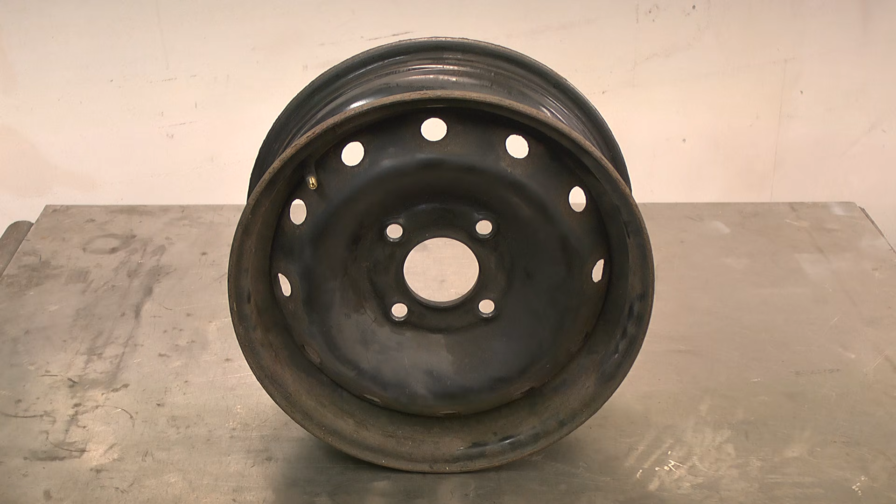This should be fun. Now my little Myford lathe is nowhere near big enough to attempt to do this, so I've been forced to create a machine off the back of it. Now these are proof of concept wheels only, and the machine itself is lethal. So for the love of whoever you regard as holy, please don't try this at home.

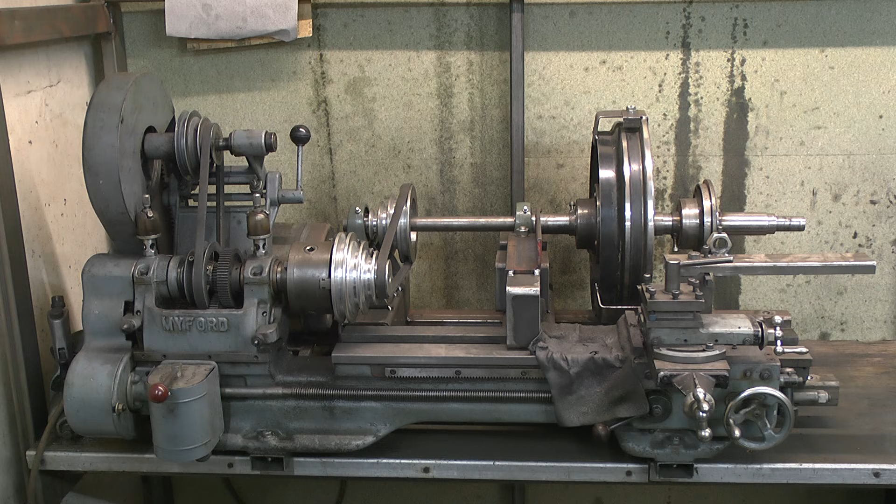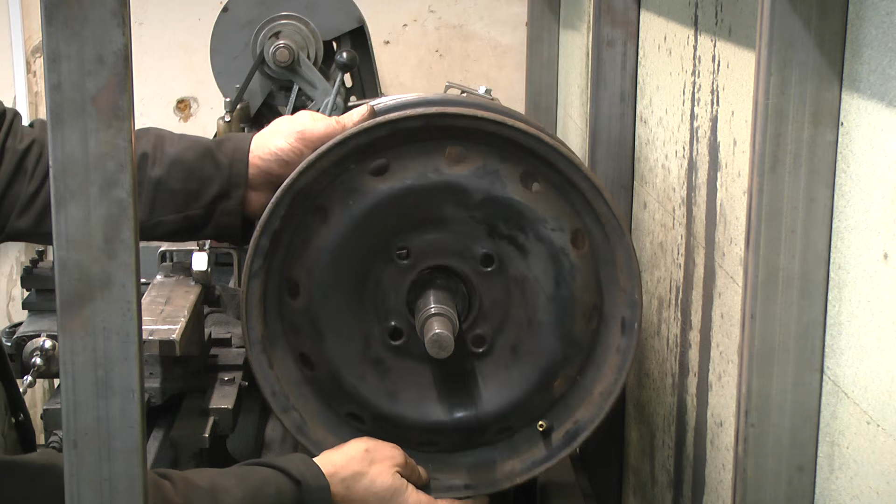The ancient Greeks wrote in legend of a terrible container in which all the evils of the world were trapped. How prophetic they were. All they got wrong was the name. They called it Pandora's box, when of course they meant Nick's imagination. For sheer destructive force, I think that if he put his mind to it, Nick would give Oppenheimer a run for his money.

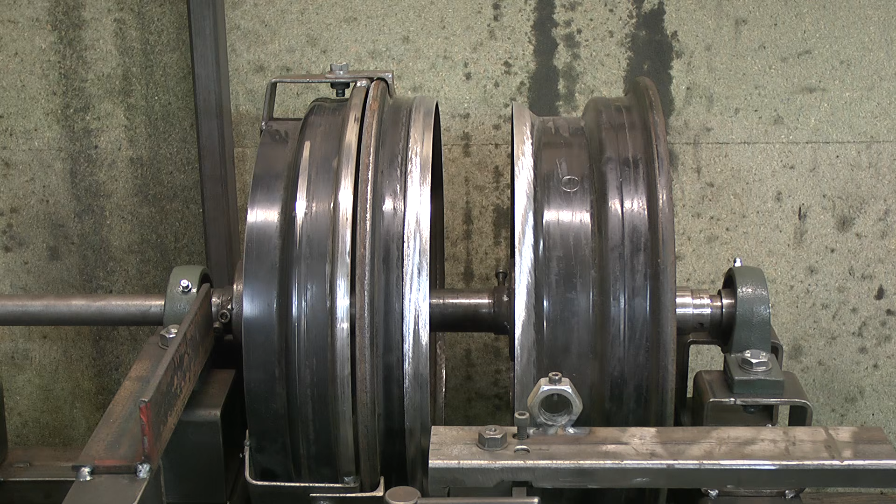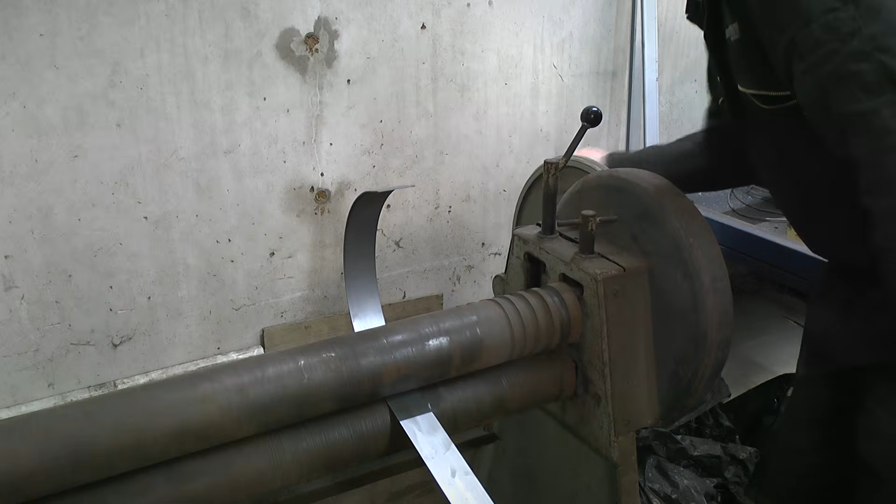The bit to the left of the wheel is effectively the drive flange, and this needs clamping up to the wheel nice and tightly. Then it's just a case of taking your life into your hands, firing it up and retiring to a safe distance. Like Spain perhaps. When the device has finished its work, you end up with a wheel in 2 pieces, into which will be going this piece of 2mm thick CR4 steel, guillotined at 52mm wide. It's 52mm to take into account the 1mm cutting tool to give us the 2-inch extension.

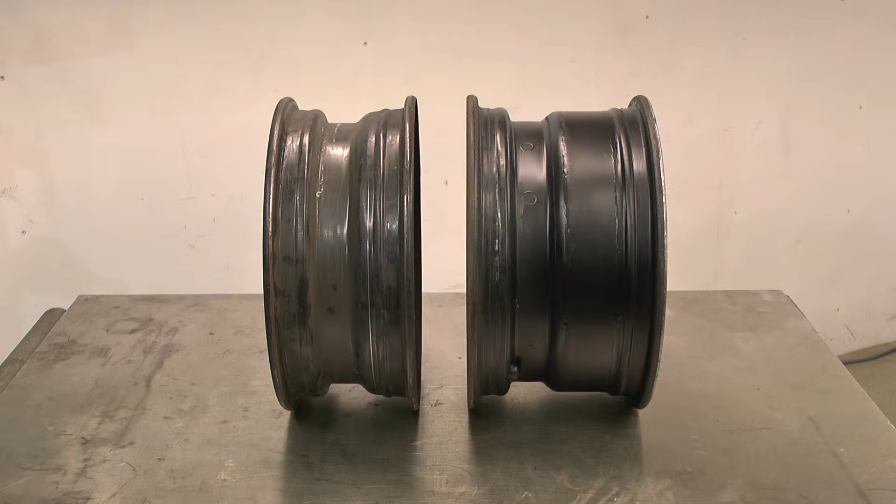After trimming it to length, the steel band is welded between the 2 halves of the wheel. And after some finishing off and painting, the wheel looks like this once we're done. You can see the extra 2-inch width when comparing it with the 5-inch version. So let's bolt them back on, replete with some new Yokohamas and see how it looks.

Well, by my reckoning that worked a treat, and we've now got a stick out of around 125mm, which is well within the coverage of a set of Mini Miglia wheel arches, for example. Brilliant! Something that's off the shelf, easy to get hold of and relatively inexpensive. Good news! Yeah. We're not using Mini Miglia arches, are we? Ah, crap.